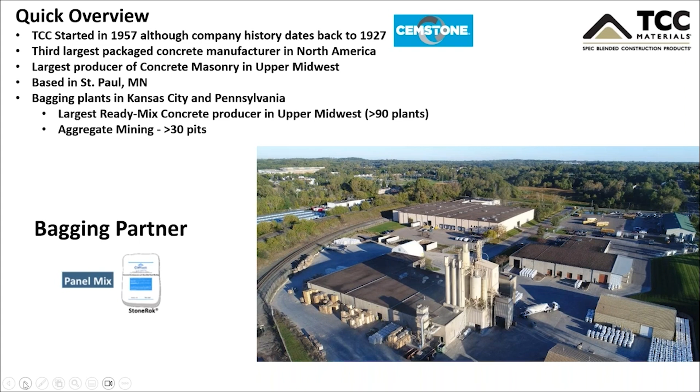But first, I'd like to mention TCC. They are our bagging plant for our panel mix called ClifRock. TCC is also the third largest bagging plant in the country, with locations throughout the United States. And as far as our system is concerned, it's pretty simple. We have a bag mix that you add 11 pints of water to and mix for a solid 3 minutes.

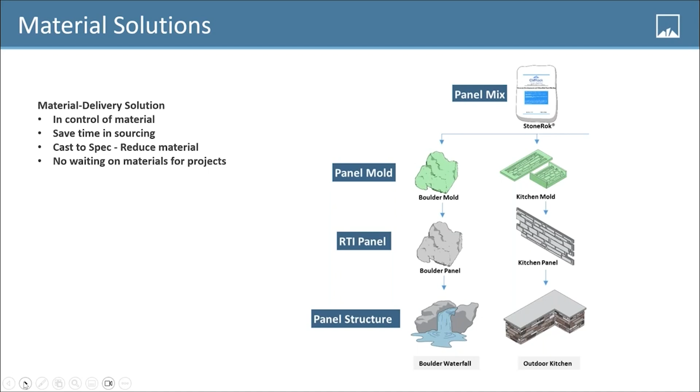Very simple, we use a material to build outdoor structures. We have many outdoor boulder and masonry mold profiles, which I'll show you later. There are really 2 different types of molds depending on what it is we're trying to do. Our boulder molds are used to make boulder structures and water features, while our masonry molds are used for a lot of different things like kitchens, fire features, sitting walls, veneer applications, and much more.

Here we see our flagship product, ClifRock. It's a hydraulic cement mortar. It has very fine microfibers that give the mix a lot of different properties: flexural strength and the ability to reach high ductility and tensile strengths, as well as impressive compressive strengths. As you can see here, our mix behaves a little bit differently than typical types of concrete you may have worked with in the past.

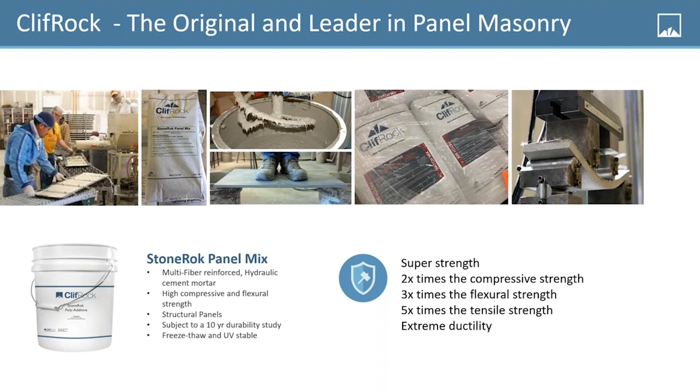It's very adhesive and it'll bond to itself. It has double the compressive strength, triple the flexural strength, 5 times the tensile strength with extreme ductility, as you can see right here. Our material has gone through extreme freeze-thaw cycles, which is important for us, seeing that we're here in New Hampshire, where the temperatures can get pretty extreme.

Basic construction systems. One of the first things you'll do with us by coming to training is to learn boulder symmetry and boulder geometry. First, we're going to hang our panels, seam the boulders together and color them, and then finish them off and make them look like this, which is very realistic, don't you think?

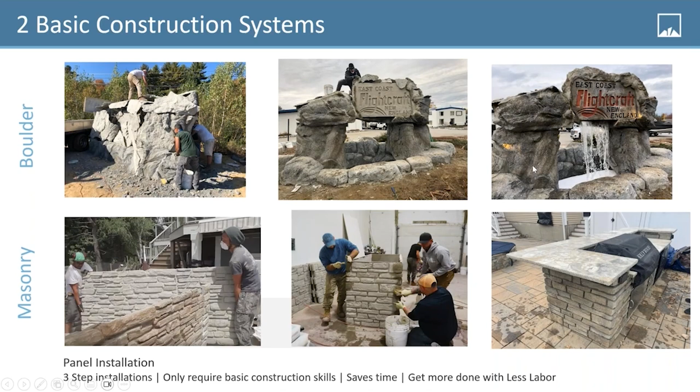Now we're going to go over our 3-step installation process, which only requires basic construction skills, which means you don't need someone who's a 10 or 15-year stonemason to do it.

The first application of the panel system was for creating boulders and water features. We knew we needed to create a system that any contractor can learn how to do and install. I like this picture here because this water feature that bridges the span of the pool was not accounted for. They were able to build the water feature after the pool was built because there was no additional footing needed to support, since we're talking 1/2-inch thick panels that's significantly less weight.

As far as our mold profiles, we went across the country taking impressions off large stone rocks and cliffs, and we made a mold system out of these profiles that represent the aesthetics of real stone. The aesthetics of the panel happen in the mold process.

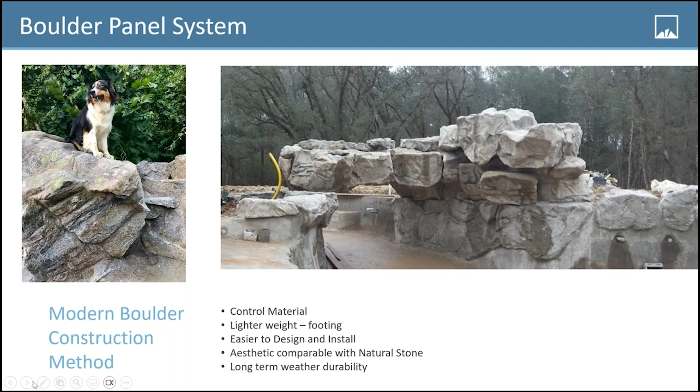I'll walk you quickly through how we make a water feature or rock feature with us. Again, 3-step method. First, we add 11 pints of water to a 55-gallon drum that has been cut in half. Next, we add a 50-pound bag of mix and mix for a solid 3 minutes, then pour it into the mold. You can see how we curved some of them to form the boulders.

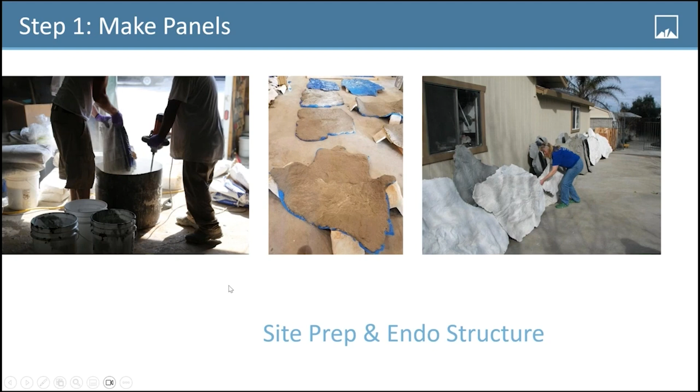Next, we're going to hang them. As we talked about, you're going to seam them together to form the boulder, just piecing these panels together until you have seams that are pretty tight. Then we take the exact same mix and we patch those seams together. The mix is designed to mechanically and chemically bond the panels together, so when the panels have cured, you have one monolithic structure with no point of weakness in the joints.

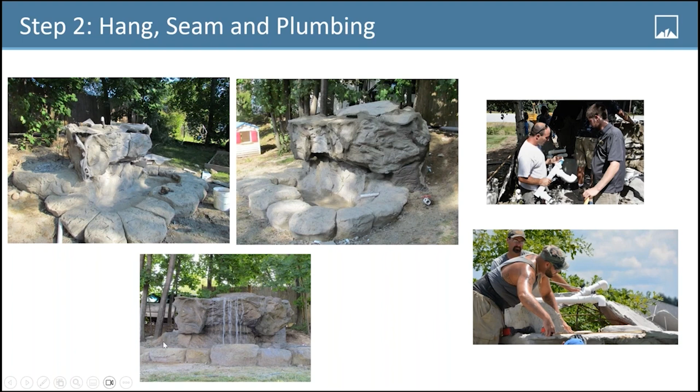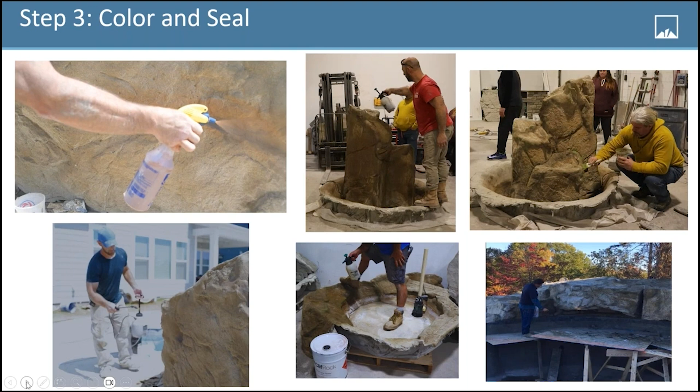You're also going to learn some plumbing installation at the training, and then you're going to color and seal them. We use pump sprayers for our coloring system for boulders. It's a 3-step coloring system that takes minutes. This is obviously an oversimplification, but it's relatively simple to build.

Landscape water features are probably our biggest application of our boulder system. Plus, if you're doing a water feature and you have limited or no access to the backyard, meaning no cranes or heavy equipment, our boulder system is a perfect way to give the homeowner a big, beautiful water feature.

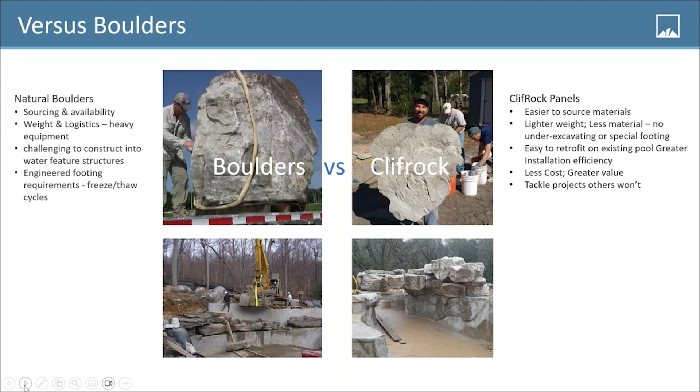Footing requirements are very high. Sourcing boulders, depending on what region of the country you're in, you might even have to source those out of state. And if you don't have the right footing in a freeze-thaw climate, these will start to degrade over time. So with ClifRock, you don't need to source a material—you make the material. It's lightweight, and you can build that same boulder in a matter of 2 or 3 hours, and it weighs between 400 and 500 pounds, whereas that boulder you're looking at there probably weighs about 3 tons.

So it's easy to retrofit around pools, and it gives the contractor the ability to tackle projects that others may not. Project economics: this is just a quick example of a water feature with a slide, steps running up the back with a little cave overhang on the front.

Don't worry, we're going to send you the presentation, so you can look at it later. But in terms of materials and labor to build that structure, you're talking about $9K. In terms of what we sell that for, I would say somewhere in the low to mid 20s, depending on your market. And in terms of profitability, you can make 60 to 70% margins easy on this type of work. That's about a 3-day project for us with a 4-man crew.

A bag of ClifRock panel mix costs somewhere between $40.57 and $48.88 a bag, depending on how much product you order at a given time. $49 is if you're ordering a single pallet. One bag will allow you to cast about 8 to 9 square feet of boulder panel, so your all-in cost is about $8 to $9 per square foot, which is a pretty safe number.

And so that was the first application with our panel system. Next, we turned our attention to the vertical outdoor masonry market, because what we saw there was a lot of room for improvement. Pretty clear data tells us that people like block for their paver patios, but once you go vertical, they want that integrated with some type of stone or a different aesthetic. But the problem with traditional masonry is you need someone with a certain skill set.

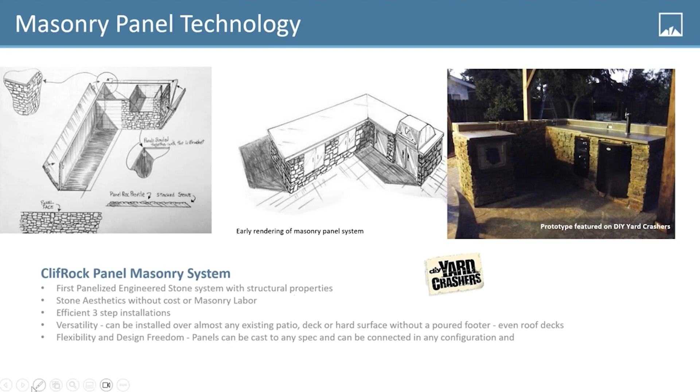And so our masonry panel technology was born. Concepts have changed, but the foundation still remains the same. Conventional masonry, like outdoor kitchens and fire features, come with challenges: poured footings, freeze-thaw concerns, and retrofits, just to name a few. It's also time-consuming, which raises material and labor costs, which can price many homeowners out of the market.

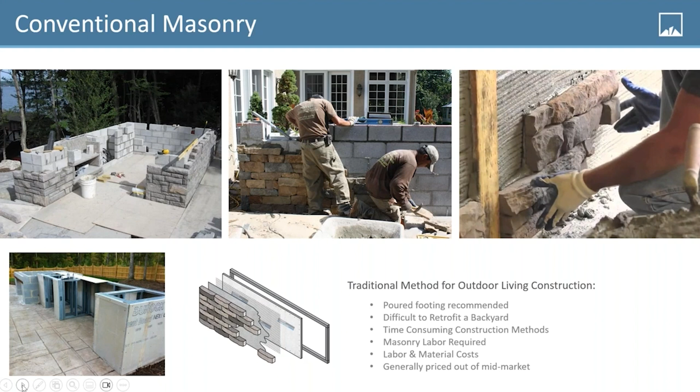The difference between the boulder system and masonry system is we went from half-inch-thick panels to about 1.25-inch-thick panels, where the stone veneer was precast into the face—again, no masonry skill set. And the panel itself, because of all the strength properties, was structural. So what that meant was when you're going from 6-inch-thick block down to 1.25 inches of material, you're using less overall material, less weight, which means you can install it over any existing hard surface, again without a poured footing. The other piece is once it cures, it becomes one monolithic structure.

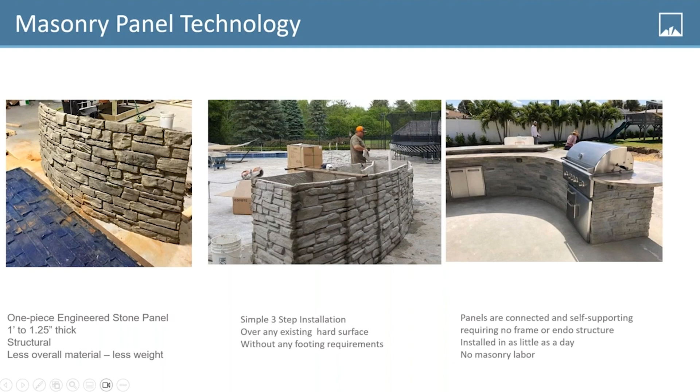And here's the kicker: we reduced it to a 3-step process where the panels are self-supported, meaning no frame or endo structure, and can be installed in as little as a day without masonry labor. Next, we're going to focus our attention on outdoor kitchens and fire features. The outdoor kitchen market is big, and it's getting bigger, becoming a standard amenity in new construction. It's the fastest growing area of home improvement at the moment, and it's not going anywhere anytime soon.

Back to our 3-step installation system, you're making your panels the exact same way. Here we have a 10-foot masonry mold. You can make a 10-foot panel, or back off the length and make a shorter panel. Pour your mix into the mold, let it cure, and then demold. Now you have a panel which can be transported to the job site and hand carried into the backyard. By the way, they can also be made on site.

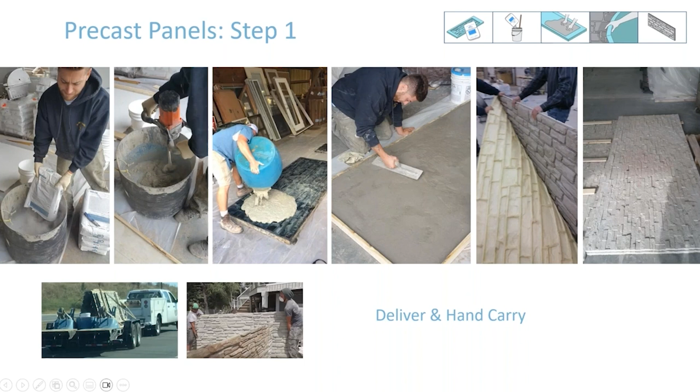Once we're in the backyard, we set up the panels. When setting your panels, abutting the two panels together, we take a 5/32 masonry bit, drill right through both of them, insert deck screws to give it a temporary hold, and then we take the panel mix and mortar the corners together on the outside and inside. And then you've got your structure. You learn how to blend the corners to get a continued stone pattern at the training.

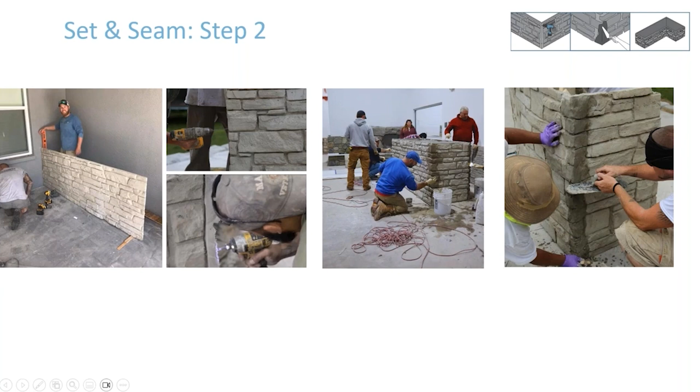Now you're going to add your appliances and countertops. Then you're going to color and seal.

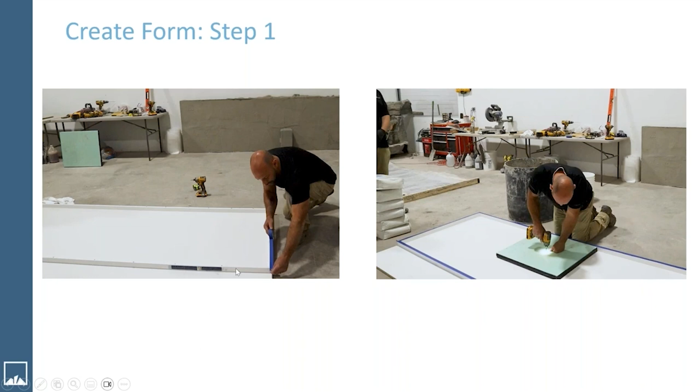So again, all of our construction methods have a 3-step process. First, we frame out our template for our countertops on a melamine board. We don't have molds for countertops because we're always doing custom countertops. We also use PVC trim for the edges, and styrofoam cutout as a place to create a void for the grill to go in.

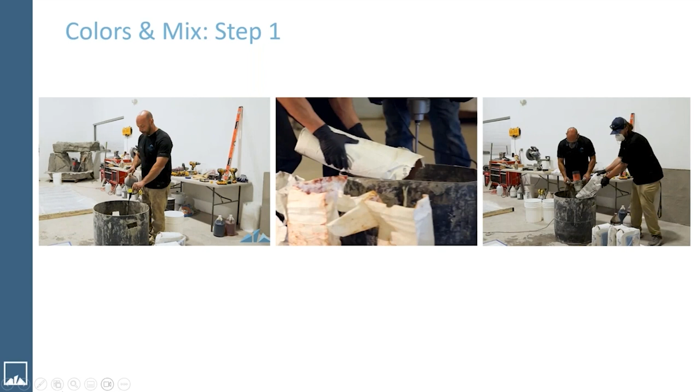Next, you're going to do the mix. Same idea with the mix, 11 pints of water per 50-pound bag. But for countertops, we're going to add the powdered integral dye right to the mix so the color is all the way through - something we also talk about in training. Next, you're going to pour the panel mix into your template. There's the foam board cutout for our grill.

We're also using fiberglass reinforced scrim, or composite rebar. We feel this gives us a little bit more flexural strength and overall strength in our countertops - we do not use any steel at all, no steel mesh, no steel rebar. So our method for using scrim: after we pour an inch of the mix, we lay the scrim down and do another inch over that. Let it cure and demold. Countertops are typically between 1.5 and 2 inches thick.

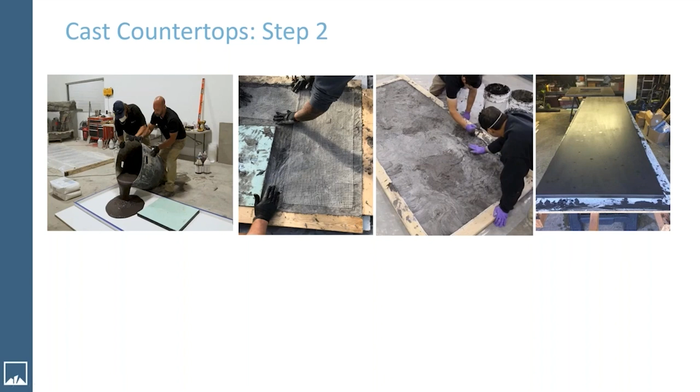Polish and seal. Here's a 14-foot run with our slate look, which is very popular here in New England. Next, we have some examples of solid countertops - black, brown, dove gray, and now we offer a white countertop mix. Some installers choose smooth edges, while others prefer a more beveled or rock edge.

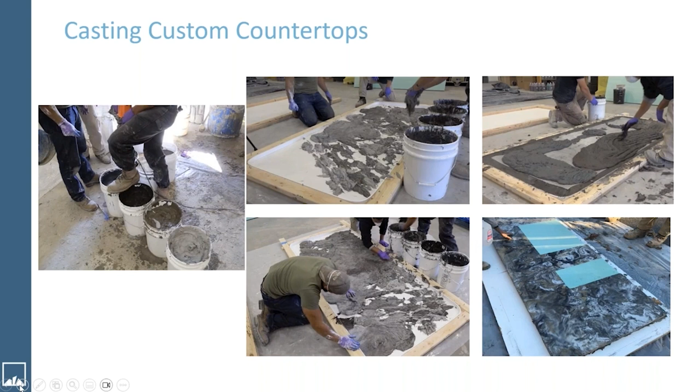If you've been to some of the decorative concrete shows, I'm sure you saw that you can get pretty exotic, different types of finishes. Here we're using different integral colors to create a custom countertop. The applications vary depending on the look your customer desires. Here we have some more examples of custom countertops.

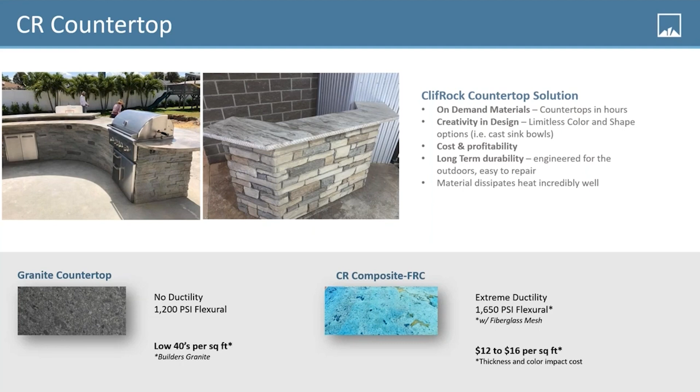Don't they look great? Compared to granite, our product dissipates heat much more efficiently, along with more ductility and flexural strength. In terms of pricing for granite, you're going to be in the low 40s per square foot, while we're going to be between $12 and $16 per square foot. Of course, that depends on your labor.

As a manufacturer, the truckload price would be about $40 a bag. If you're buying it by the pallet, you'll be at about $49. You're going to get 5 to 8 surface square feet area per 50-pound bag for a masonry mold. Your all-in cost will be between $9.50 and $11.50 per square foot.

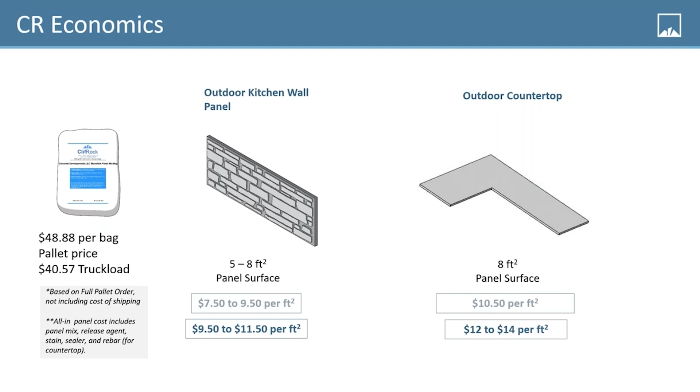The reason for the range is, with the panels like the barnwood or the dry stack, you're going to be 3/4 of an inch to maybe an inch thick. Rock profiles like the random rock, ledge stack, and cut stone are going to be closer to 5 surface square feet per bag because those panels are going to be thicker. For countertops, the range for your all-in material and labor should be between $12 to $14. But I think you're going to get an idea for the margins that we're going to be able to make here.

Now, in terms of advantages of the install, one of the ways that we really were able to separate ourselves from the competition here in New England is definitely the speed of the install. Let's take this 7-foot grilling island. Again, we're typically able to install these structures in one day, something that is typically unheard of in the masonry and hardscape industry. We're able to accomplish that. So in an instant gratification society, as you can imagine, that gives us a leg up on our competition.

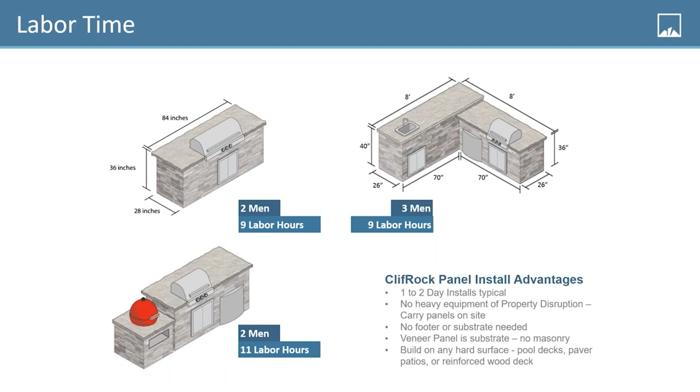If you're doing something a little bit bigger, this 16-foot 8x8 L shape might take you a couple of days, right? But I think you get the idea. It's typically going to be a 1 to 2 day install. We're turning the job faster and we're able to do multiple jobs at the same time. So our margins are going to be significantly higher than using traditional methods.

As far as economics, I'll focus on the 7-foot island. It'll cost you to install anywhere from $175 to $200 a linear foot to build this island without shipping. This does not include any appliances. You really don't want to price in your appliances for your grilling stations, you definitely want to add that later. But as you can see, your cost of goods sold to build a 7-foot island should be around $1,600.

Meanwhile, your competitors are getting $800 to $1,000 a linear foot for a full rock install. So we price our kitchens accordingly. We do undercut them a little bit, but not to the point you might expect. So to build a 16-foot 8x8 L shape will cost you about $2,500, including material and labor. Again, we're adding the appliances on top of that.

So even if you're pricing your kitchens pretty aggressively at $600 a linear foot, which in your mind and our mind is a pretty aggressive pricing point, you're still making well over 73% margins. If you're pricing these kitchens at what we would price them, that $800 per linear foot, you're at $12,800 and your margins are closer to 80%. So common sense tells us that a lot less material and labor gives us greater pricing flexibility, more competitive price points to the customer, and higher profit margins to the installer.

Some other applications with our panel mix: we have interior walls, indoor fire features, countertops. Our panel mix is also great for commercial projects. Here we have a kitchen installed at a college in New York with dry stack, and also this luxury apartment complex, Avalon Properties, with an outdoor grilling area for their renters.

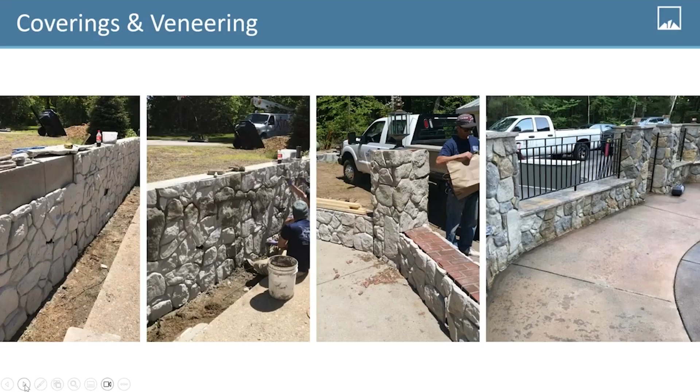Over existing steps, we've created a modern panel masonry system that allows us to build fire features the same way we're building the outdoor kitchens. It's panel on panel, same idea. We're also using our material for the caps. The only thing you're not going to use ClifRock for is the insert. You're going to use refractory panels or fire-rated brick.

This solves 4 major challenges. We can get a custom stone look without masonry skill. Our masonry panels are the substrate, and we can retrofit almost any type of insert, whether it's gas, propane, or natural wood. We have all of them. We're going to go through that in a minute.

When would you think about doing a fireplace on a deck? There'd be some obvious challenges there that limit design with regard to size, height, and shape.

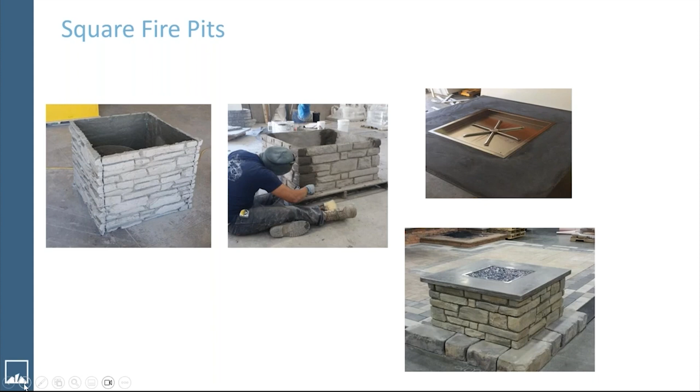Square fire pits. We took our 10-foot mold, scored every 2.5 feet, and when we demold the panel, we took our diamond tip grinders, cut the scored lines, and now the corners match up perfectly. Then we seamed the corners with a panel mix and created a countertop in less than a day. Here we have some examples of fire pits.

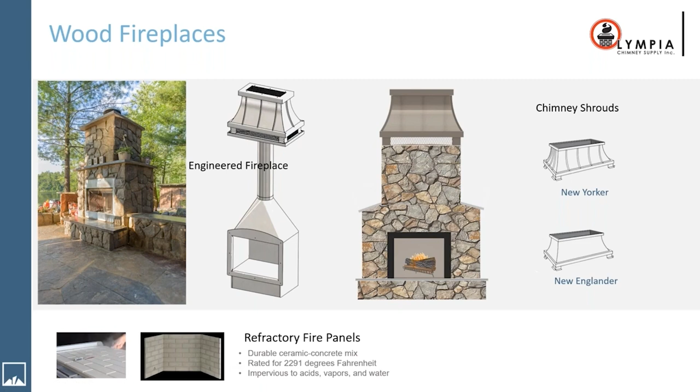Here we have Olympia, who has created this custom wood-burning fireplace insert exclusively for ClifRock installers. If you are doing something really tall, the stack will actually go up to 22 feet, and it's adjustable, and there's your copper chimney shrouds. Here are some examples of some wood fireplaces.

Our fire feature supply partners are HPC and Olympia, which brings us to our supply solutions.

Customers told us they would much rather work with a contractor that could provide all aspects of the install, a one-stop shop, if you will. They told us the last thing they wanted to do with their spare time in their evenings was look for grills, appliances, or inserts for their projects.

So similar to a buyer's group, and because of our vast network of installers, we've been able to negotiate wholesale pricing, free or reduced shipping, and in some cases, lifetime warranties for many of our solutions. Again, things you can take advantage of or not, totally up to you. We feel that providing what your customers want and earning revenue in the process is a pretty good deal for everyone.

This brings us to the last section of the webinar.

As you can see, our products aren't hard to install, and it's a lot easier than doing the traditional old-fashioned way. We do not sell our product to any retail outlets, supply channels, or distributors. We only sell our product to our authorized installers, so it's a closed channel network. This means that you're always guaranteed the best price by working directly with the manufacturer. There is no middleman. You buy directly from us.

We ship you directly from one of our bagging plants. We have over 450 installers right now, and we're growing. That said, we're selective on who we work with, and we're looking for companies that are committed to business development and differentiating themselves in the marketplace. We're looking for companies that want to take advantage of our programs and our strategic partnerships, like the supply partners, for example, and take advantage of our training and ongoing support.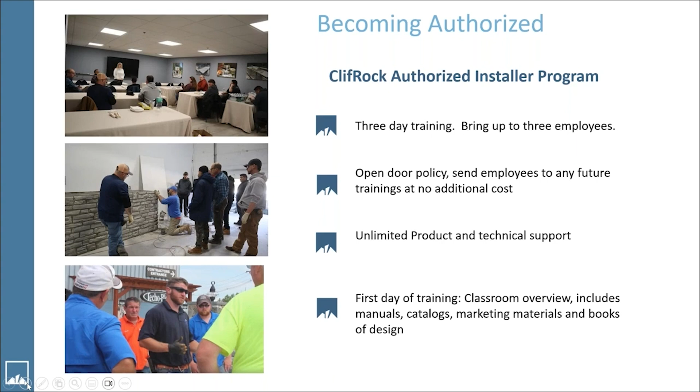After you build a boulder with your team, we will focus on a small or medium-sized functioning water feature. After we finish that, we get into kitchen training, where we go through how to build an outdoor kitchen from the very beginning stages to the end, seaming corners, coloring, cutouts for your appliances, the grill inserts, and of course, countertops. As you can see, we keep you pretty busy for those 3 days.

The idea, of course, is that when you finish, you have the confidence and the know-how to get back to your area and do some installs. And we have a whole support team that will be available to you. We'll talk about that in a few minutes here, because we're not just a manufacturer. We sell and install this product ourselves. So we're able to take the guesswork out of this. We can help you integrate this tastefully as a bolt-on complementary service to your already successful business.

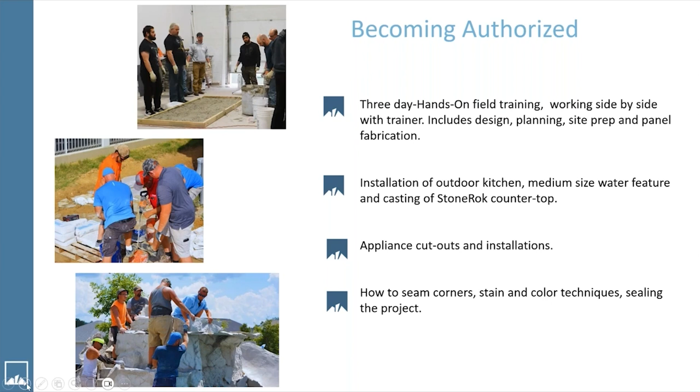Once you've gone through training, we have an open door policy whereby all future trainings are available to you and your employees at no additional cost for the training itself. We have very strong infrastructure programs, different marketing systems and tools. When you get back home, that's when our work really begins, because now we need to build out your infrastructure for sales and marketing, as it's a sales-driven business.

We have several different types of programs. First and foremost, we have online and offline marketing programs. As far as offline marketing programs, we have very strong tangible collateral - brochures, marketing pieces, idea books, books of design, photo albums, everything you possibly imagine you would need for the residential, commercial, and builders market.

We also have pop-up banners and poster boards for any event or home show. Our books of design is a series of design tools that we put together for one of our installers that was going to do a presentation with Toll Brothers, one of the country's biggest home builders. When we put this together for them, we realized that this might be something all of our installers want to use.

Different configurations, lengths, shapes, appliance packages. Home builders are always looking for add-ons to upsell their home buyers. All of the marketing collateral you see here can be customized with your company name, logo, phone numbers, email address, and your brand. Our trademark logos and brands like ClifRock are free to use or not to use, totally up to you.

Once a company becomes trained, you get access to our Google Marketing Drive that has PowerPoint presentations, webinar series, in-home presentations, high-resolution pictures, home show event material, just to name a few. And they can be uploaded directly to your iPad or laptop.

Our project estimator tool is a great way to portray professionalism and organization. Our installers use this all the time, whether they're doing a home show or in-home presentation. It's a great way to get your pricing and estimates together pretty quickly. Again, we are a one-source solution, which also includes our strategic supply partners.

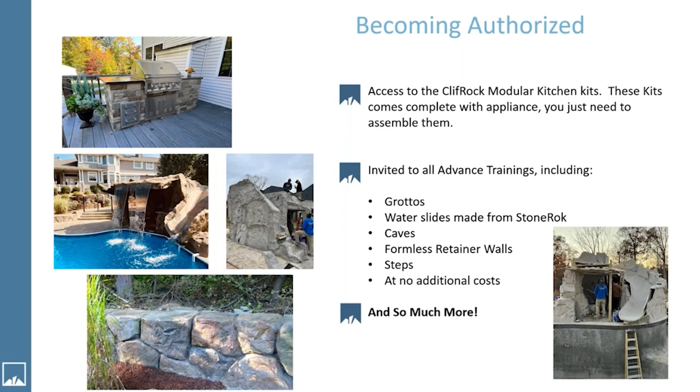I know I just went through a lot of material, but just to recap, our installer program includes in-depth training, lifelong training including advanced installations, product and business support including technical support and estimation assistance, marketing and sales infrastructure, a marketing drive and webinar series, online training modules, and so much more.